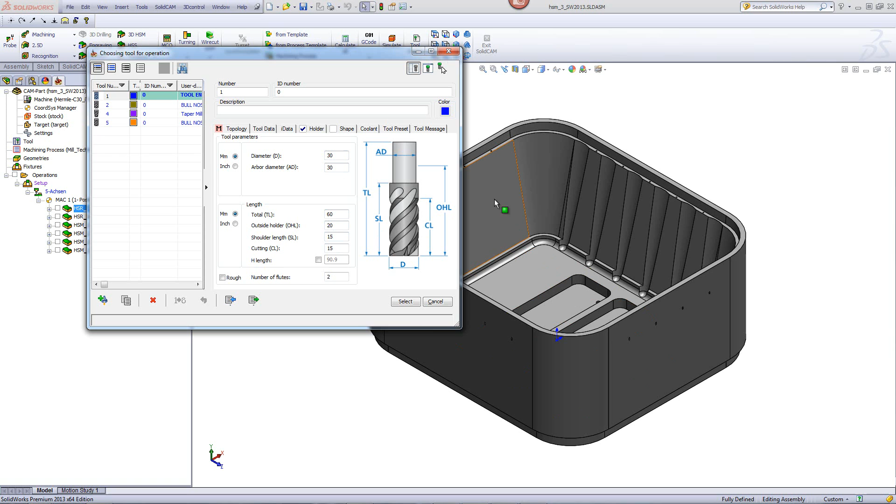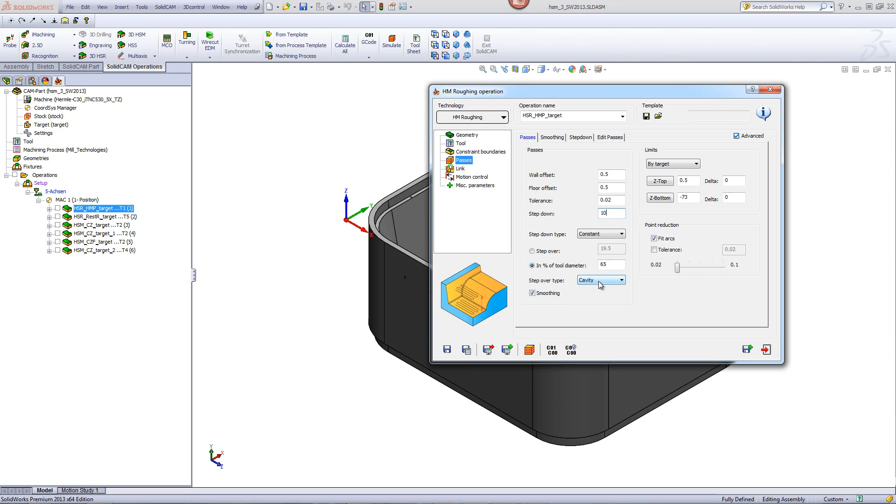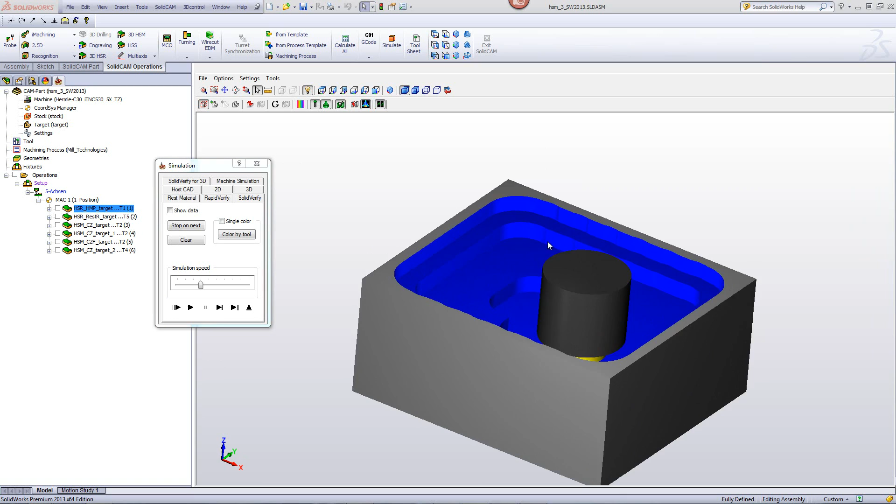If we take a look at our simulation, you'll see that our tool will go in to the middle of the part, start a helical motion around the part itself, and now when it goes down to its next step, you'll note that it has a wider step away from the wall, and that's because it's making sure the holder is not colliding into the stock over there. If we go further down and then we take a side view of our cut over here, you'll see that our holder is actually inside the part itself, but again being moved away from the wall of the stock, allowing it to go as deep as possible into the part itself.

In our next operation, we'll begin doing a roughing operation, but we'll be using the option of rest roughing, and this time using a smaller end mill of 16 millimeters with a 1 millimeter radius at the edge. And the tool will be outside of the holder by 30 millimeters, allowing it to go even further down into the part itself. If we take a look at our passes area, you'll see that we will again be leaving a 0.5 millimeter offset on the part itself, and this time going down every 5 millimeters.

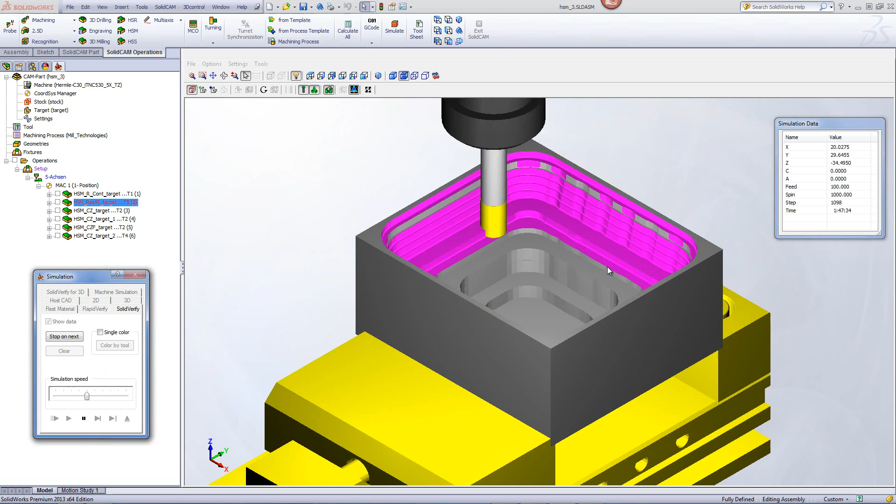If we take a look at the simulation, you'll see that the tool is working only on those steps, clearing off those steps as it's going further down into the part itself, and only working in those areas until it gets to the very bottom of the part, and also cleaning out those pockets which the larger end mill cannot work in before. From this point on, we'll be doing our finishing operations, and we've broken this down into several different areas.

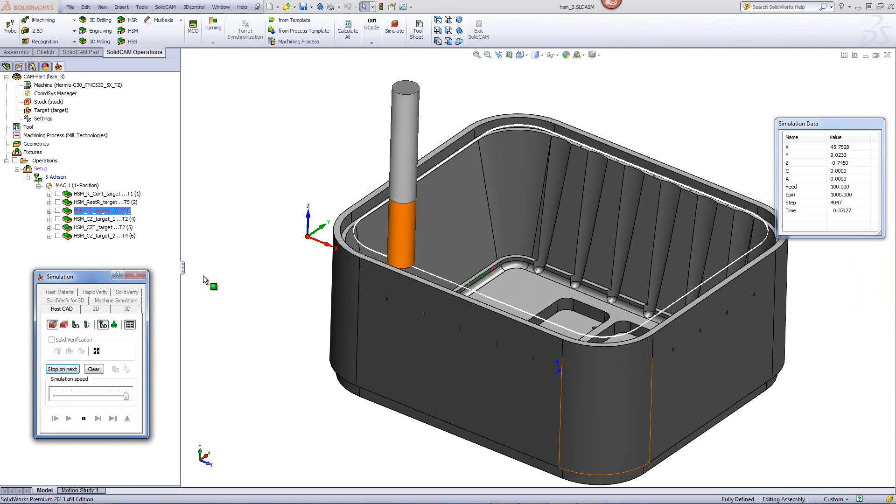Our first area that we're working on is the top flat surface over here, and if we go into the operation itself, you'll see that we'll be using the option of constant Z machining. The tool will be a 12 millimeter bullnose end mill with a 0.5 millimeter radius. And if I go down to the passes, you'll see that we'll be going down every 0.15 millimeters, and we'll only be going down 5 millimeters into the part up until this step as shown over here. If I were to take a look at the simulation, you'll see that the tool will be working around this area over here up until that particular surface only, not going any further down on that material.

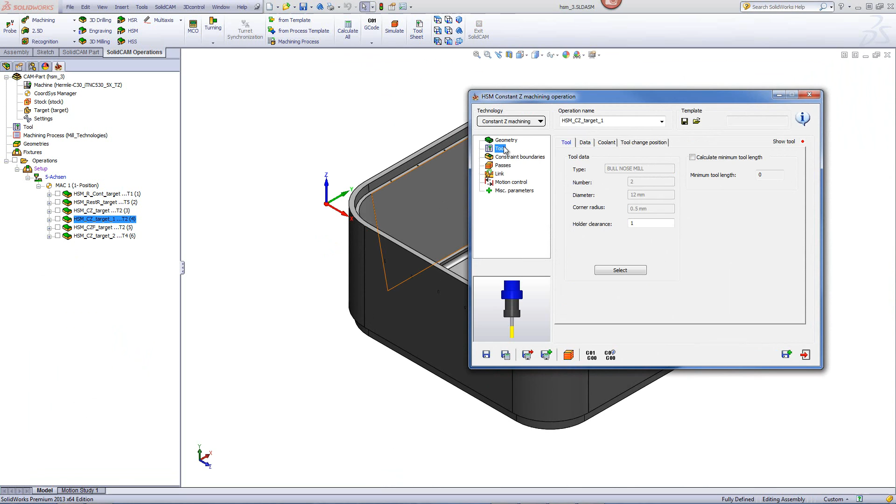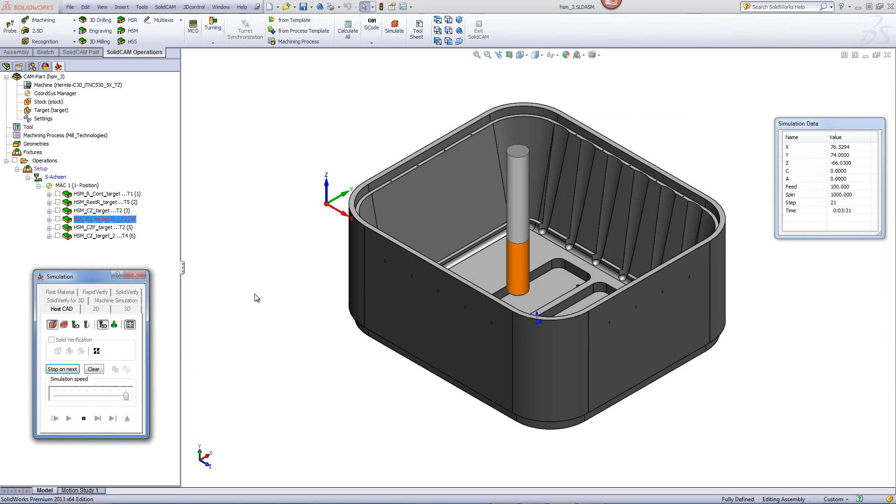Now, in our next operation, we'll be using the exact same tool as we did before, the 12 millimeter bullnose tool with a 0.5 millimeter radius. But if we go into our passes area, you'll see that we'll be working between the depths of -62 and -72. In other words, we'll be working from this surface up until this surface over there, only working in that area. Again, stepping down every 0.15 millimeters. Taking again a quick look at the simulation, you'll see that the tool works exactly in those areas only.

In our next operation, we'll be doing a horizontal finish on the part, working only on the flat floors of the part itself. If we take a look at the tool, we'll be using again a 12mm bullnose tool with a 0.5 millimeter radius. And if we go into our passes, you'll see we'll again be working on the lower areas on the bottom over here, on this surface and on this surface over here. If we take a look at our simulation, you'll see that the tool will only work on this area and in this area alone. No other areas were machined.

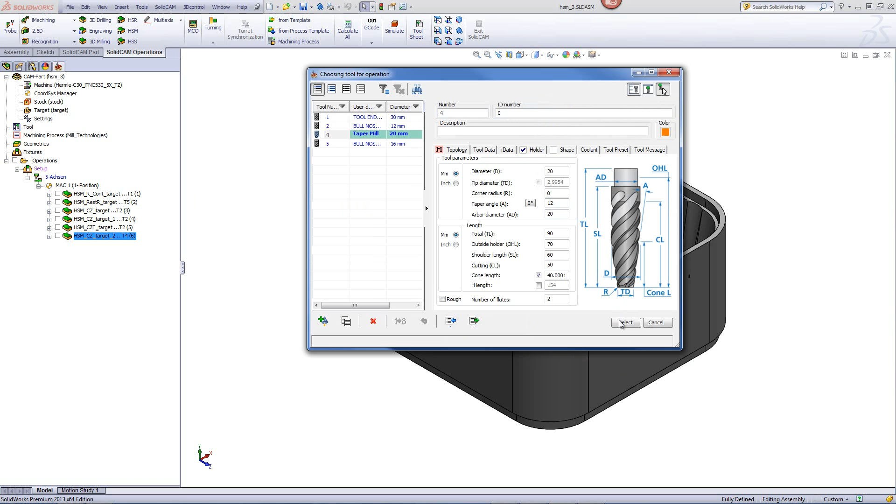Now in our final operation, we'll be working on these tapered walls around the part. For that, we've used the option of constant Z machining, and since HSM recognizes also tapered tools, we'll be using a 12-degree tapered end mill to machine out those walls. And since we are using a tapered end mill, in our passes, we can take large step downs of 10 millimeters on the part itself. If we take a look at the simulation, you'll see that the tool will work exactly on those tapered areas, stepping down every 10 millimeters as shown over here.